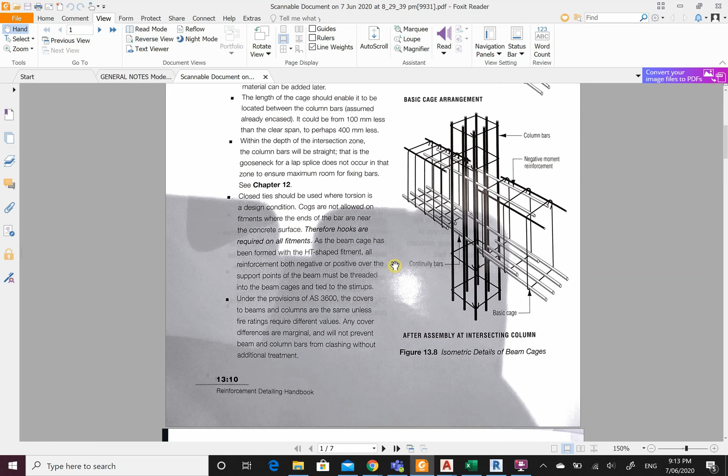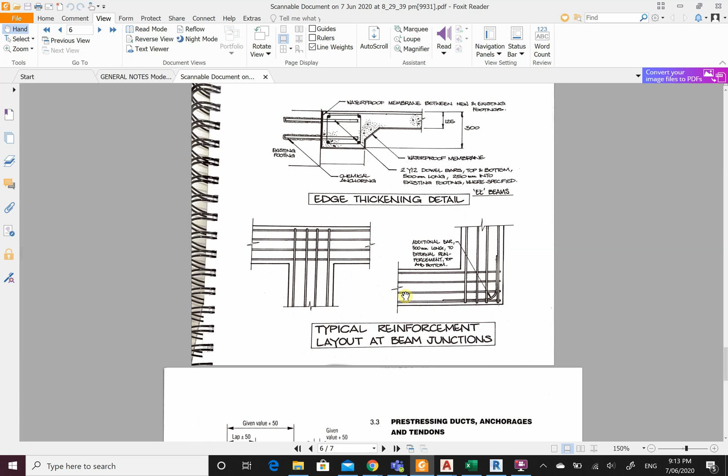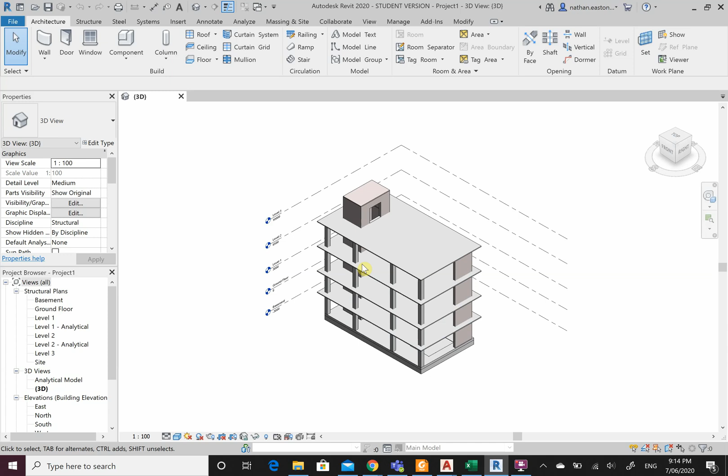So first things I'm going to do is I'm going to put in the reinforcement into these columns. I'm going to come to my ground floor, going to delete this section. I don't need it now. That was for our set down. Before I start putting in reinforcement, I'm going to set my cover. So I'm using 40mm for the columns, 20 for the beams, 30 for the slabs. So let's put them in. Structure, reinforcement, rebar cover settings, and I can add here.

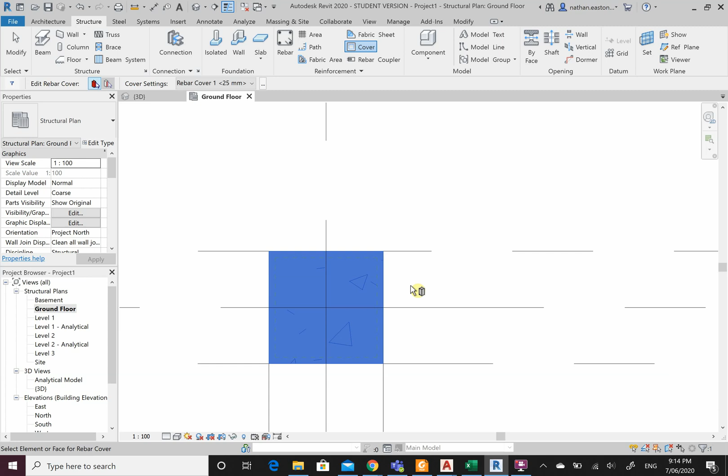Our cover, these green dashed lines shows you the cover. I can click on the member. You can see here my rebar cover 25. Click these three dots and I can add in here as well. So Revit gives a 25mm standard. So this one's going to be my columns, my beams, my slab. My slab is going to be 30. My beams is going to be 20, not 22, 20, and my columns is 40.

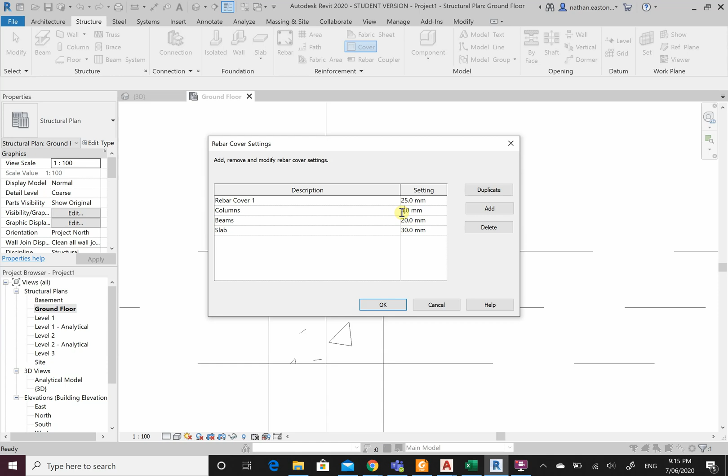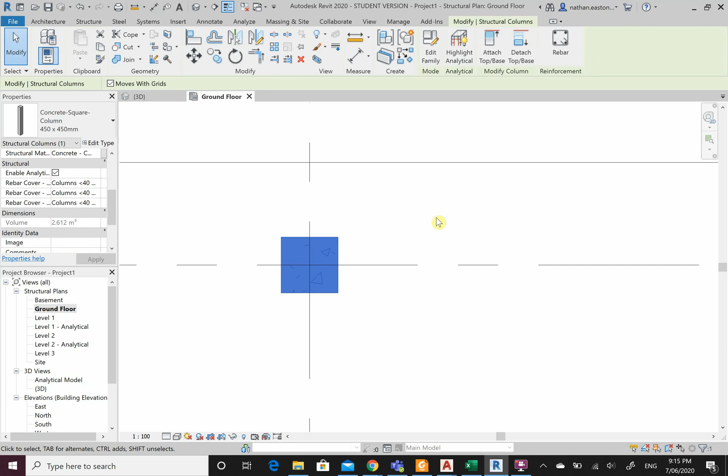Okay. So now this green dashed line is showing where the cover is, which is still at 25. So select it and I can change it up here. So now I can see that has indented with the cover. Or what I can do is simply change it in here as well. Alright. So I might just change up all of them first. So select one, select all of them. Is it gonna let me do it? Yeah, it will. Select them all in here. Cover to the columns. So now I have a 40mm cover.

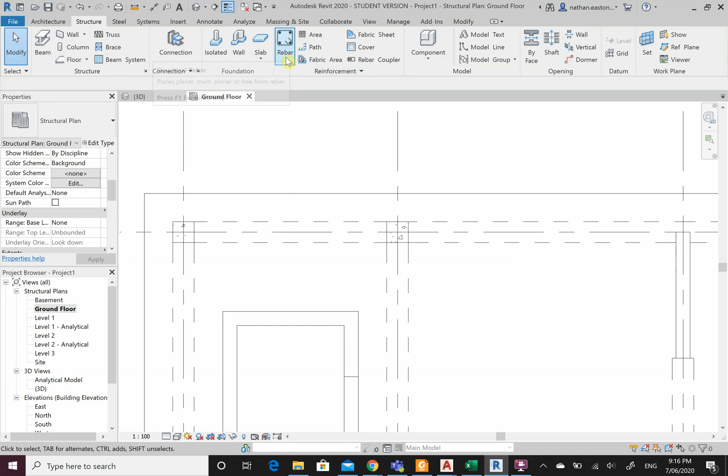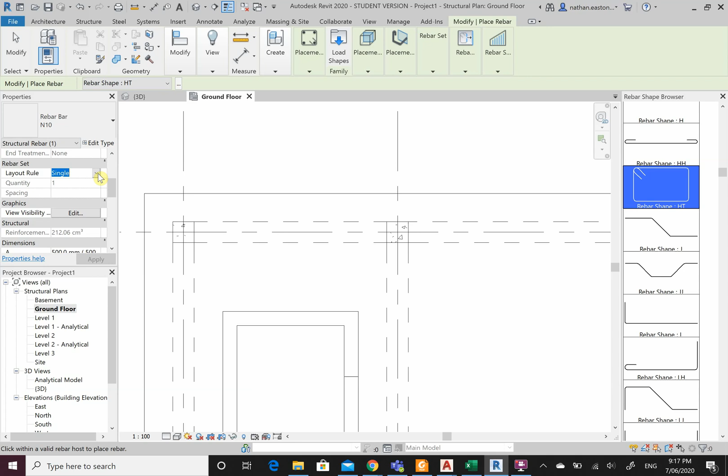Rebar. Okay. So we're mainly using these HT and the S shapes. So the HT is our ligatures, our stirrups or fitments. In a beam, these provide shear reinforcement. In our columns, not so much. These provide a lateral restraint for buckling of our longitudinal reinforcement. So HT, for our columns, we are using N10s, so 10mm thick cage. So N10, my layout rule is going to be a maximum spacing of 300. This layout rebar set is also up here, so either or will work.

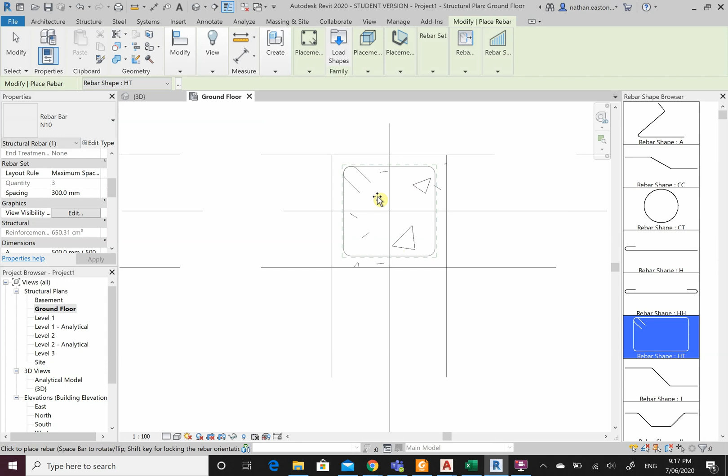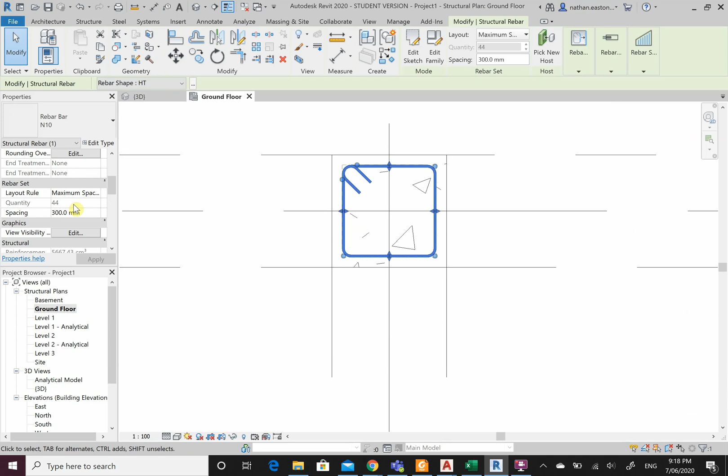I'll change my view visibility straight away, just so I can see it as a solid line in 3D. Now I can see where the tie is sitting in that top left hand corner. If I move my mouse around, it will move, or I can hit spacebar, which will flick it around. For our columns, not so crucial. For our beams, it might be, especially for our footings for our house, just because of how you can actually tie these together. Just going to change to a fine level of detail so I can see the thickness, and I'm going to chuck these here. So now these are in, escape. If I select it, I have 44 of these running up my column.

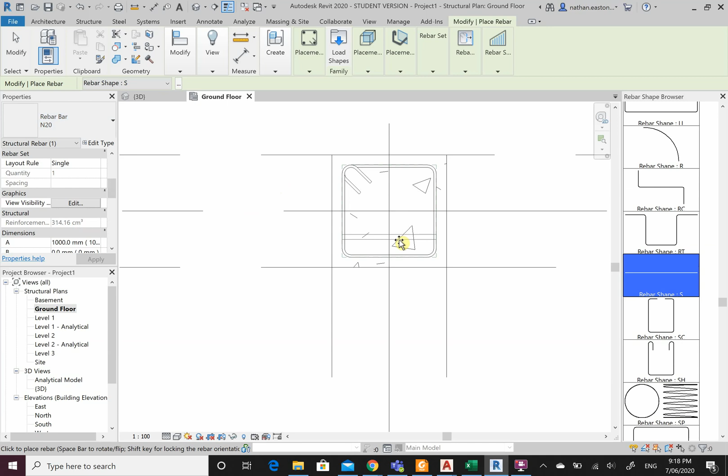Now what I need to do is put in my circles or my longitudinal reinforcement. So rebar shape S, and these are N20s. Now, at the moment, I'm in the wrong plane because I can see the actual length of the reinforcement. So I changed the placement to be parallel, and now I can see it. Now, whilst I'm moving freely here, I'm actually moving from the center point of that circle. If I move up and touch or go past the ligature, it kind of becomes stuck to it. So as I move along, it will snap.

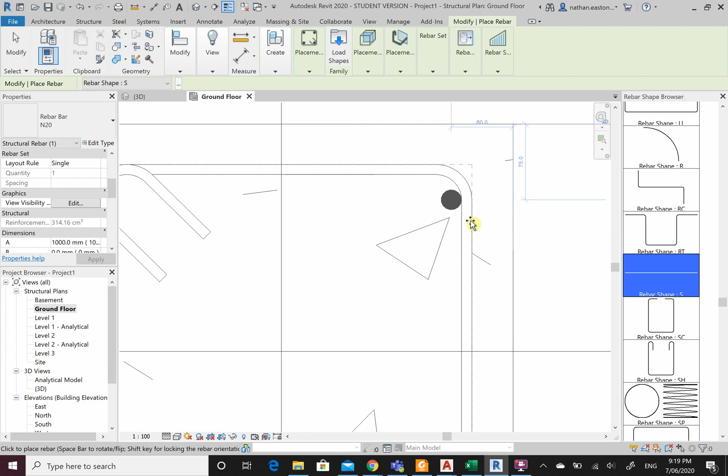So that jump there is to the edge of the straight line. You can see this is running straight, and then it starts to curve for an arc. So that point there is the edge of this straight line. The second snap is the midpoint of the arc. That's where we will be placing our reinforcement. If I come down again, that third snap is the straight line of this leg. So put one here, put one here. We can put them one by one, or I can change my rebar set to a fixed number of 2, and I can snap to there. Escape.

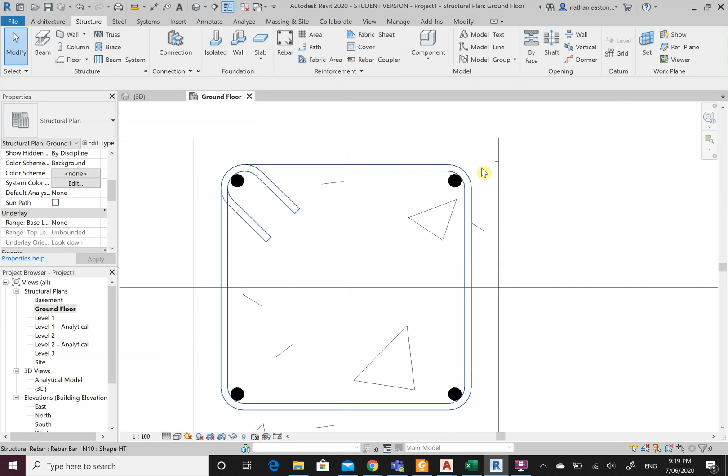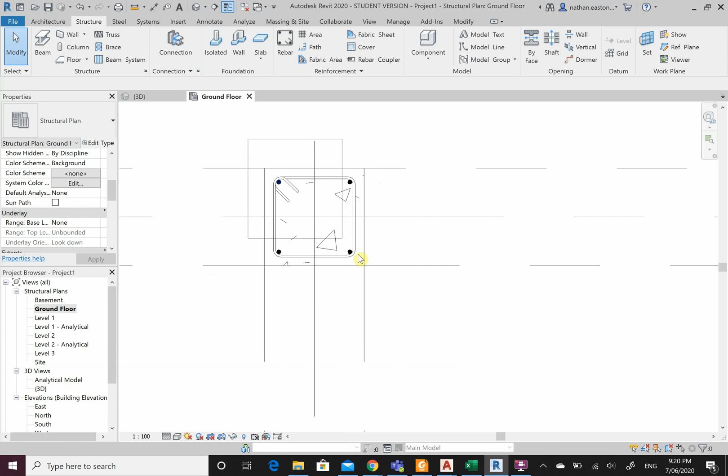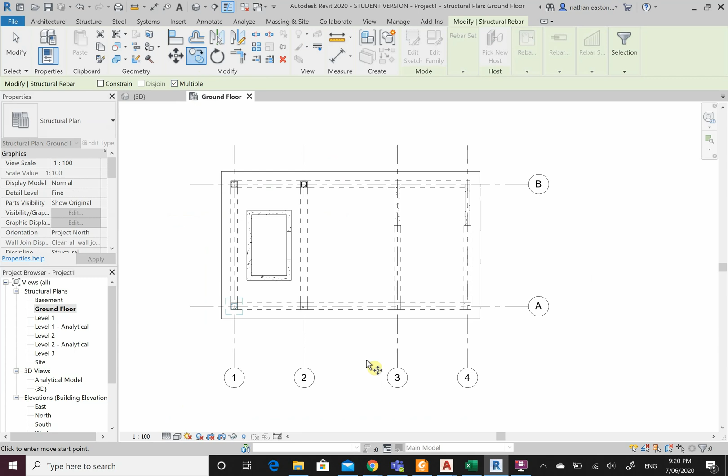We have these in all 4 corners for our columns. If it was circular, you'd have the same thing. They're even. You can additionally see them at these midpoints as well. Obviously our columns are symmetrical. Our reinforcement is symmetrical due to biaxial bending. So it can bend this way and it can bend this way. Now, once I've done one, I can select all of them, filter out. All I want is my rebar. Go OK. Now all of my columns are the same, so I can copy from my grid lines, copy again, down, copy, multiple. So I can go from here straight across.

Now these walls and these walls are going to be precast. So these aren't going to be cast on site. We're not going to detail the reinforcement here. We will leave this up to the subcontractors that are putting it together. They have their own engineers that work on precast and pre-stressed concrete.

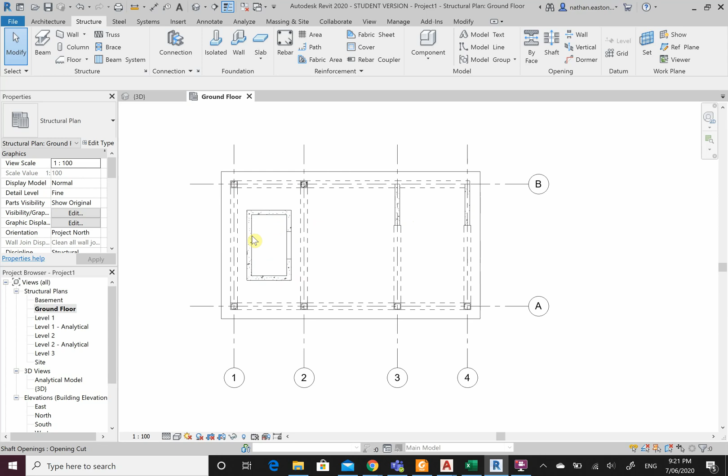Now, the copying of this rebar only works if the columns are the exact same dimensions, including the height. So if we had one spanning at different floor levels, copying these across wouldn't work. So just keep that in mind.

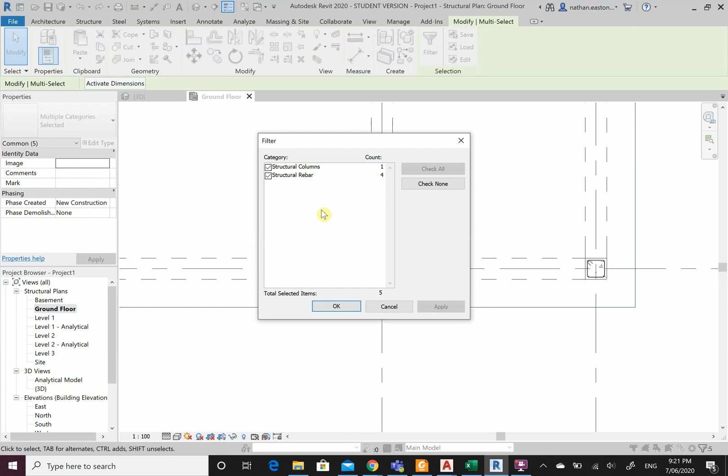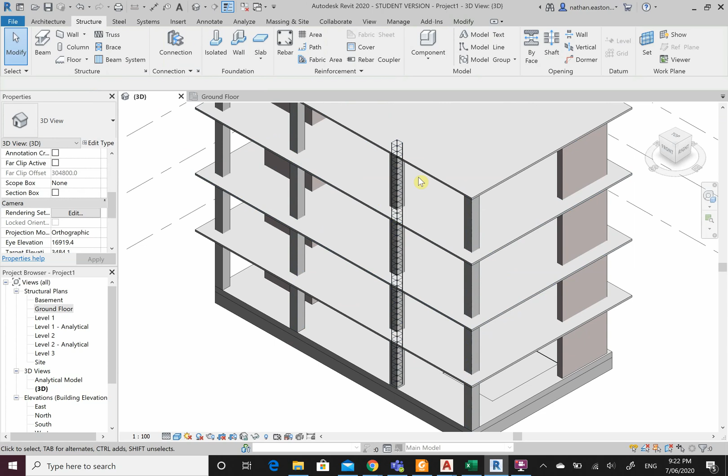Now I'll select these again, filter out, and I'm just going to grab my rebar, just going to change this here, change all my views, make sure I can see it in 3D, come back to my 3D, change this to fine. So I've put rebar in all of them. Okay, so this is what I've tied together. You can see my ligatures and you can see all of my longitudinal reinforcement.

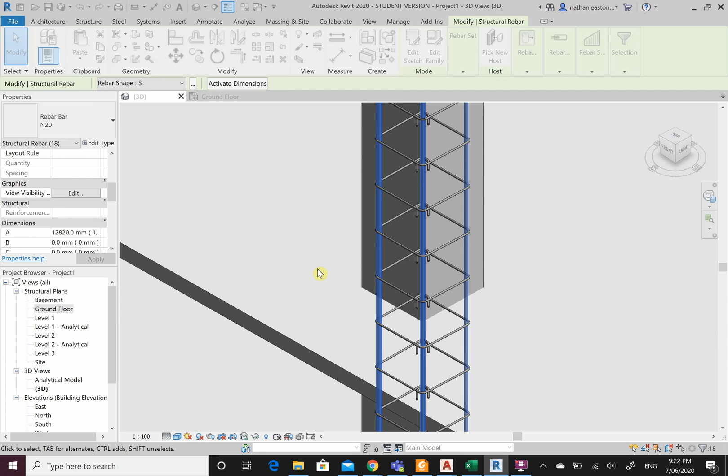I reckon we can't see these other ones. I reckon I've made a mistake. I don't reckon I've ticked the box. So let's just double check these ones. That's better. I've done the same for ligatures. Select them all. Now let's do it again. It's better. Awesome. So now I can see all of my reinforcement for my columns. My 4 columns at the front and my 4 at the back.

Now we're going to be taking a lot of sections through here, so just keep that in mind. These will get a bit messy. Just follow through and we should be okay. Basically what we do for one floor is going to be the same, with an exception. What I will show you is for our slabs, we're going to be just putting in a basic SL82 mesh.

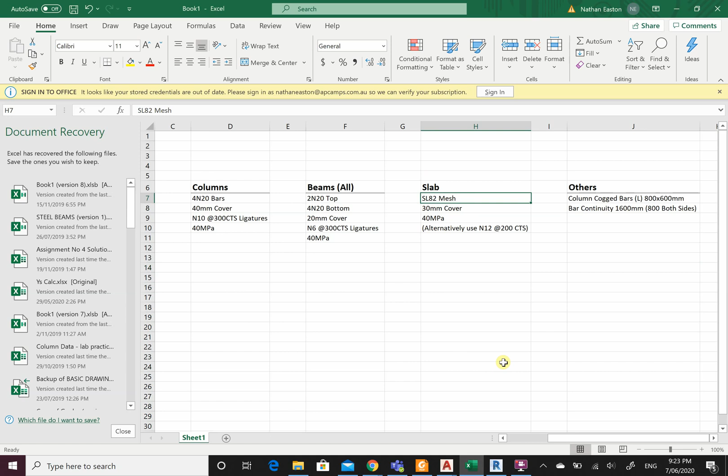Realistically, you won't just have a mesh in these slabs. You can, I guess, respect the fact that these slabs are spanning from a beam here to a beam here, which is an 8 meter span. The self weight of the slab alone will crumble and will crack. So we're going to need to have bottom reinforcement. You'll have either Bondex sheeting or N12s in both directions or something like that.

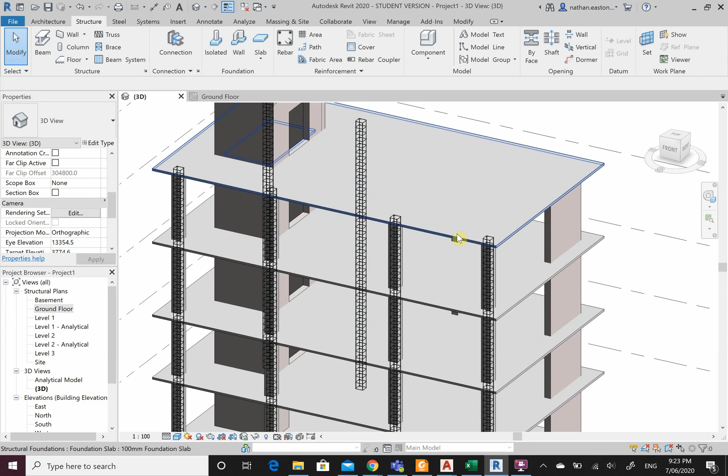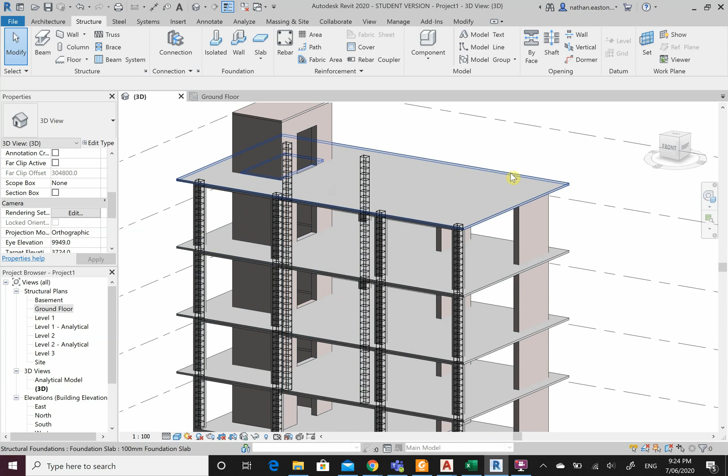You have to do the calculations, which you'd be learning now in structural analysis for your 2-way slabs, using these beam supports. But to keep it simple, for your practical 5, all I'm going to ask is you put in SL82 mesh, but if you want, you can put in the N12s on the bottom layer, which I'll show you how to do. So that being said, let's put in our mesh first, and then I'll carry on the beams in another video.

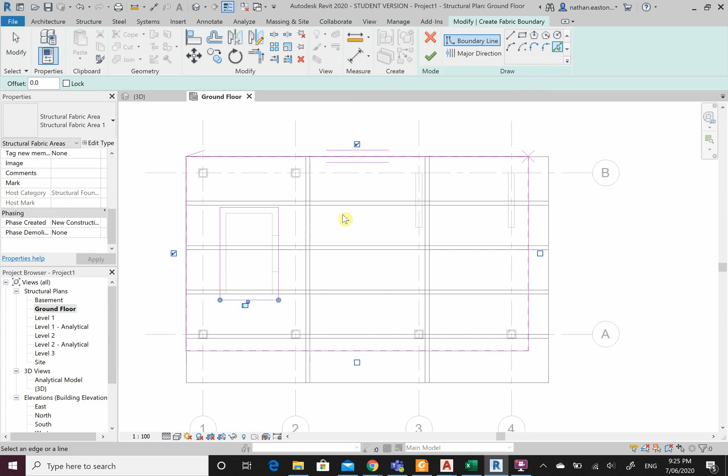So ground floor, structure, fabric area, select the area, which is going to be this slab here. Alright, now pick lines. Now I'm not going to have any reinforcement sitting in here. Remember, this is a core wall, it's a hole. So SL82, so looking at the properties now, coming down to find SL82.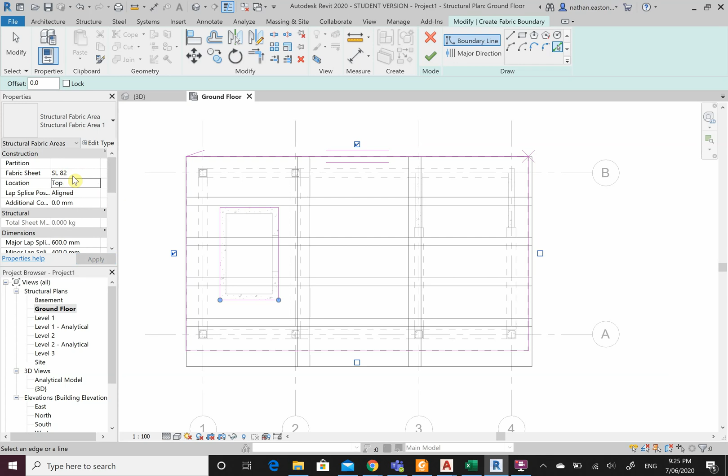What we can do is we can put them on the bottom if you want to, put them on the top. You can play around with different things, leave it aligned, leave it on the top. Because even if you're going to put in the N12s down the bottom, you'll still need to have some up top as well for crack control. Or what you'll do is you'll put in your N12s again up top in your negative moment regions. Okay. So put these in, click the tick.

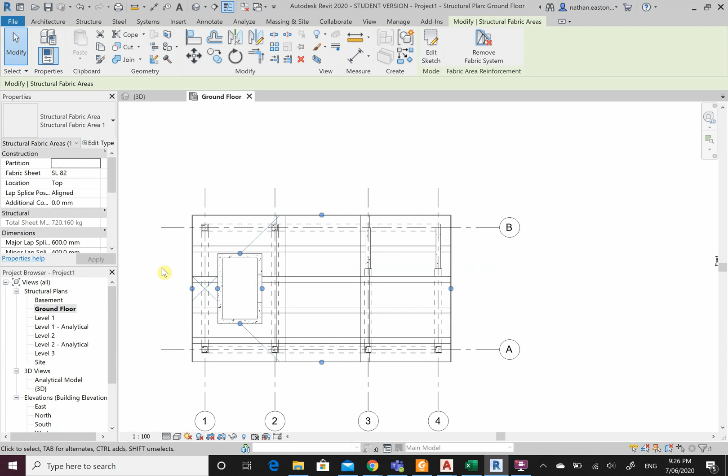Now this has still left the cavity for where my elevator is, but I have mesh everywhere else. So we'll need to repeat that for all floors, or you can copy them up if you would like. So you can use an east view. Oh, you're not going to be able to copy these up. They're selected to the host. So we'll do them floor by floor.

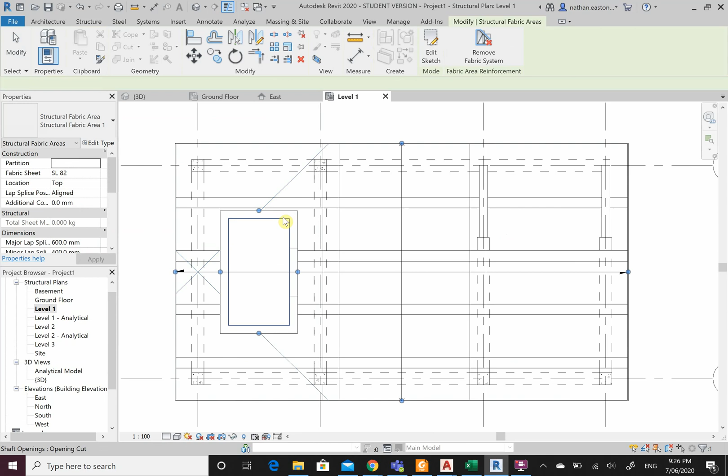So I've done the ground floor. I'll do level 1. Fabric area. Click the slab. Pick lines. It's either this or you can reconfigure the host. But this isn't too bad just to do it. It's the same thing, but it gets pretty quick. So there's level 1, level 2.

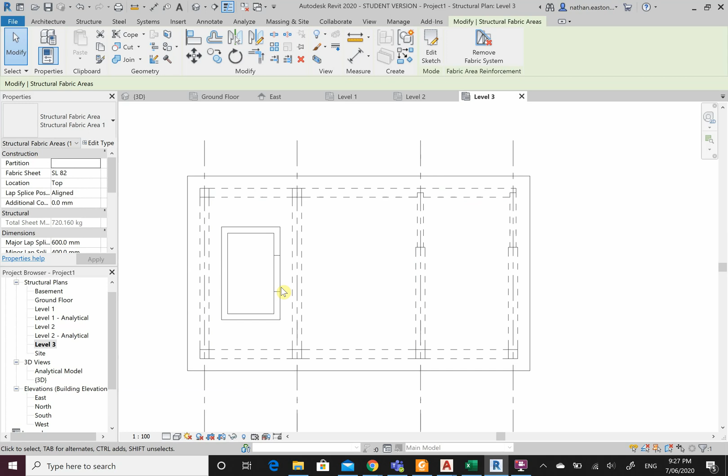Now I'll leave level 3 to put in my N12s. If you don't plan on doing it, I won't dock you any marks. But make sure you put in your mesh in this top slab for now. Okay, and same with the basement. You can put them in here. Just be careful, you will have an error here when you put that in.

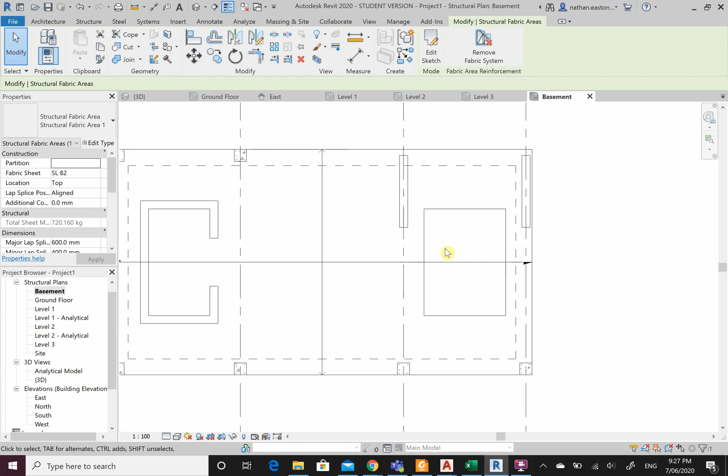Your mesh won't sit 30 millimeters below this point. This is already set down by 30. What I will do is I'll leave it for you guys to have a play around with as to how to drop another 30 below here, and then I will cover that in class in the following week. Okay, so please do all of them, and I'll move on to the next video with putting in our reinforcement for our beams.